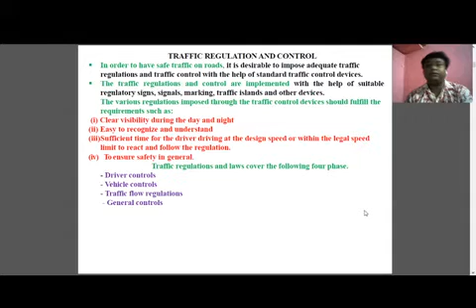Next is sufficient time for the driver, driving at the design speed or within the legal speed limit, to react and follow the regulation. Suppose you are moving on a road and in some places they highlight that the speed limit is 35 kilometer per hour. That is a kind of regulation or measure to control the traffic. If that regulation were not there, vehicles might pass that portion at 60 km per hour, but due to the geometric features they have fixed a speed restriction of 30 or 35 km per hour. These are control measures taken to reduce accidents, ensure smooth flow of traffic and ensure safety in general. If there are fewer chances of accidents, safety will increase.

Now, in the broad aspect, what is the regulation and control on the driver? First, control on drivers includes the eligibility for driving motor vehicles, the issue of driving licenses and other regulations on drivers during the act of driving. Second, as per the Motor Vehicle Act, the minimum age for getting a driving license for a non-geared two-wheeler is 16 years, and for a geared vehicle it is 18 years. Driving a motor vehicle without a valid driving license is an offense. As you all know, it is an offense to take your two-wheeler or four-wheeler out without a driving license.

Before the issue of a driving license for a specific category of vehicle, one has to undergo a specific test, the driving license test, conducted by the respective motor vehicle department. The driver is expected to demonstrate his ability. Separate requirements and tests have been specified for driving different categories of vehicle. Drivers are prohibited from dangerous driving, including exceeding the specified speed, drink and drive, and talk and drive, meaning talking while you are driving. These are prohibited, and all of you have faced this type of thing at some point in your life.

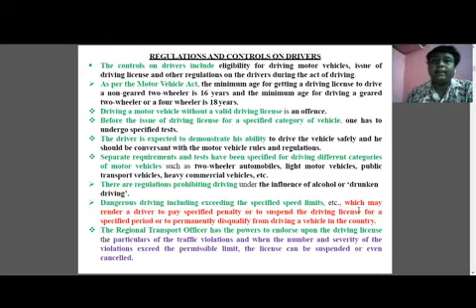So these are the very general and known things of your daily life, to get the idea about the various control devices. Next is the regulation and the control of the vehicle. This is the continuation of the previous. The regulation and control of vehicles include: the registration is essential, the information about the details of the vehicles, the different specifications of the public transport or hire vehicle or the private car, the specified color of the registration plate. The regulation covers at last the third party insurance.

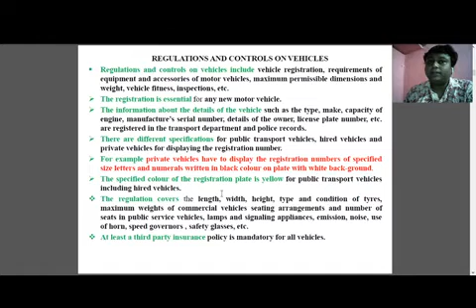So insurance is one of the most vital things. It is initiated at the beginning of your purchasing of any two-wheeler or four-wheeler or six-wheeler or any type of vehicle. So the implementation of the regulation. Basically, the traffic regulations have been enacted and implemented in India with the help of the Motor Vehicle Act in 1939 and the revised Motor Vehicle Act in 1988.

This has covered various traffic regulation measures like driver, vehicle ownership, vehicle operation on road and in traffic street. The various items covered are the traffic sign, traffic signal, the halting places, the speed of the vehicle, the gas emission. These are some of the parameters considered. Some of the most common traffic regulations are the one-way regulation and the turning restriction. The various other regulations are stop, speed limit restriction, overtaking restriction, parking. These are some general restrictions that should be implemented on the roadside.

Now we will talk about the various types of street, based on the traffic movement, whether it is a one-way street or a two-way street. Two-way means the vehicles are moving in both ways. One way means the vehicles are moving only in one direction. So in a one-way street, in a congested street, one of the methods to reduce accidents and ensure the smooth flow of traffic is by regulating the traffic along one street. If the vehicles are moving in a particular direction, then the accidents will definitely be comparatively less compared to the two-way street.

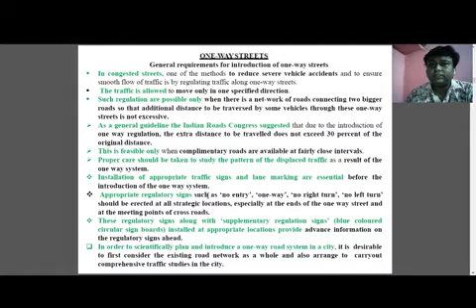So you can see that these are some one-way streets. I will not read out all the points. These are the basic things about the one-way street. Next, what is the advantage and disadvantage of the one-way street? The advantage is it increases the average travel speed, more effective coordination of signal system, increase in roadway capacity, more streamlined movement of vehicles, reduction in serious accidents involving head-on collision, reduction in conflict points at uncontrolled at-grade intersections resulting in reduction in accidents. I have already discussed the conflict points, at-grade and grade-separated intersections, so you have an idea about them.

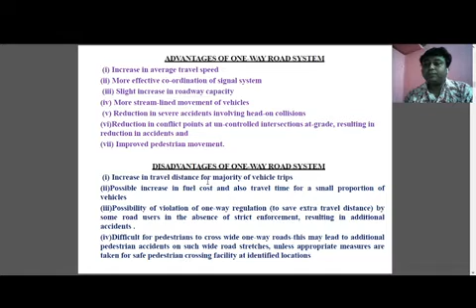Improved pedestrian movement. So these are some advantages, and there must be some disadvantages. The disadvantages are it increases the travel distance for the majority of vehicle trips, possible increase in fuel cost and also travel time for a small proportion of vehicles. If the travel distance increases, then definitely the travel time and fuel consumption will increase. Possibility of violation of one-way regulation by some road users in the absence of strict enforcement, resulting in additional accidents. It is difficult for pedestrians to cross wide one-way roads. This may lead to additional pedestrian accidents on such wide road stretches.

The traffic control devices installed along the road should be well within the field of vision of the drivers who are driving the vehicles at the design speed. The device should distinctly draw the attention. The location of these devices should be such that there is sufficient time for the drivers to respond and take

the appropriate action. The most common among the traffic control devices are traffic sign, traffic signal, road marking, and traffic island. Traffic island has already been covered, that is the rotary intersection or the roundabout. In addition, road lighting is useful in guiding traffic during the night.

So it is also essential that these traffic control devices and their meaning should be easily understood even by the road users who are not familiar, because these are some technical terms, but all the users using the road have not gone through this subject or have the proper technical skills or knowledge about these terms. So the dissemination of the information should be in the simplest form, so

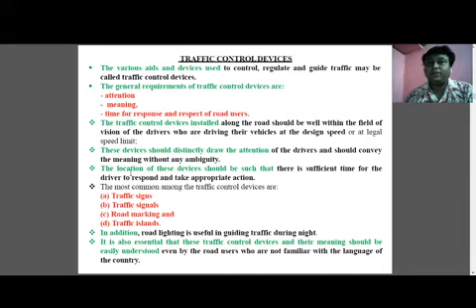that everyone in the country or in that area can understand what is actually defined. So this is one of the very important things which should be kept in mind while disseminating any traffic information through some traffic sign or through some road marking. So these are the general features of

All regulatory and mandatory signs are circular in shape. So keep in mind that for different types of signs, the shape and the color are different. So regulatory and mandatory signs are circular in shape with only two exceptions. They are the stop sign of octagonal shape and the give way sign in inverted triangle. So keep in mind that the regulatory or mandatory signs are always in a circular shape, excluding the stop sign which is in octagonal shape and the give way sign which is in inverted triangle shape.

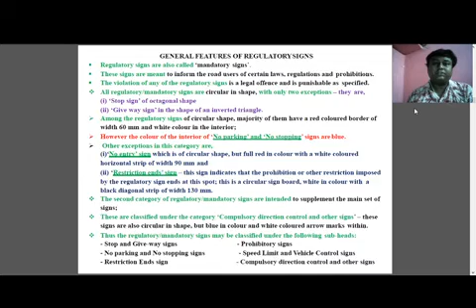So these are some signs you always find on your road or in any marketplaces, near any shopping places or dining places or your movie complex, multiplex. You can find this type of regulations each and every day, but you have not looked into this matter with serious concern. But next time when you visit any market, just get an idea how it actually looks, because these are very common things which you can find in your daily life.

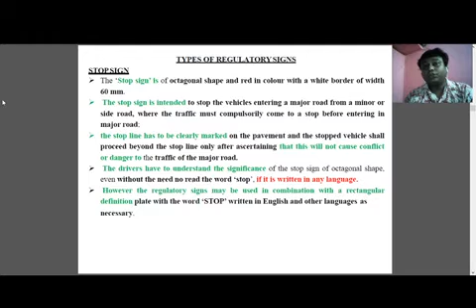Now the types of regulatory sign: the stop sign. The stop sign is of octagonal shape and red in color with a white border of width 60 mm. The stop sign is intended to stop the vehicle entering a major road. The stop line has to be clearly marked on the pavement. The drivers have to understand the significance. However, the regulatory sign may be used in combination with a rectangular definition.

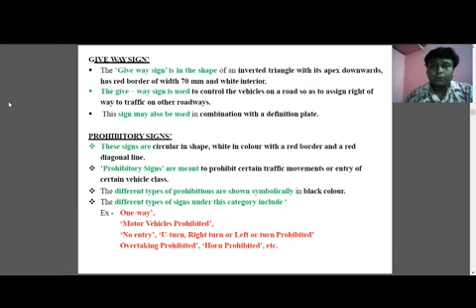There is a give way sign; give way means you want to give the passage to another vehicle. Then the prohibitory sign, no parking sign, speed limit sign, restriction end sign. So these are the various types of signs you can find in traffic design or in traffic engineering.

Next is the warning type of sign. That was the regulatory sign; this is the warning sign. What are the various types of warning signs? Warning signs are in the shape of an equilateral triangle with the apex pointed upward. They have a white background, red border, and black symbol. Warning signs or cautionary signs are used to warn road users of certain hazardous conditions that exist on or adjacent to the roadway. The warning signs are to be located at a sufficient distance in advance of the hazard. This distance is to be based on the design speed or the legal speed limit of the road stretch.

The commonly used warning sign is a sharp curve. This sign warns you that there is a hairpin bend just 30 meters from your present location. So these are warnings where there are chances of an accident or collision. There is a sharp curve, right hand and left hand curve, hairpin bend. So these are basically the warning type.

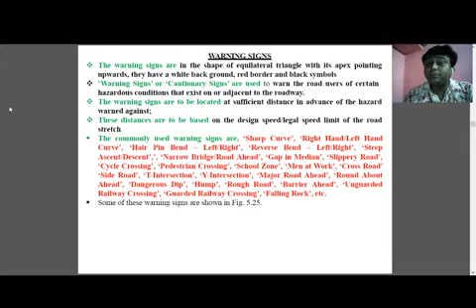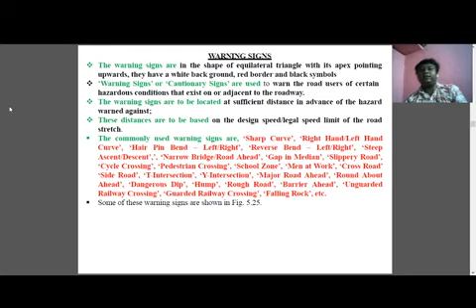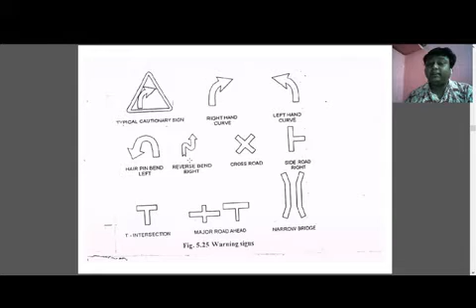Suppose a school is nearby, within the 50-meter zone. There may be men working at a particular area. In some places you can find that work is going on, men at work, please take a diversion. So these are some warning type signs you need to follow on the road. A typical cautionary sign: right hand curve, left hand curve, hairpin bend. These are the particular directions or structures of the various types of warning sign.

Next is the informatory signs. By the name itself you can get the meaning. An informatory sign gives you some information. Suppose, as I said in the beginning, you are traveling on a totally new road at night, and suddenly you need some fuel. You need to have an idea of where the fuel station actually is. By this informatory sign you can find out that just after 2 kilometers you can get a fuel station. So this is the informatory type of sign.

The informatory signs are rectangular in shape. The signs are used to guide road users along the roads and inform them of destination and distance, thus making travel easier, safe and pleasant. The color chosen for informatory or guide signs depends on the classification of the road. On national highways and state highways, informatory signs shall have a green background with the border and word messages in white color. For all other categories of road, such as MDR, major district road, ODR, other district road, and VR, village road, these signs have a white background with the border and word message in black color.

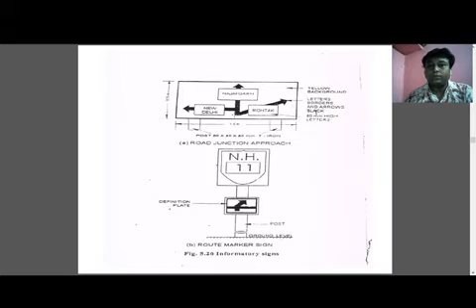Suppose at a 3-point junction, if you go to the left side you can find New Delhi. If you go straight you can find Najafgarh. On the right side you can find Rohtak. So basically this gives you the information about the direction of the road or the facilities along the road.

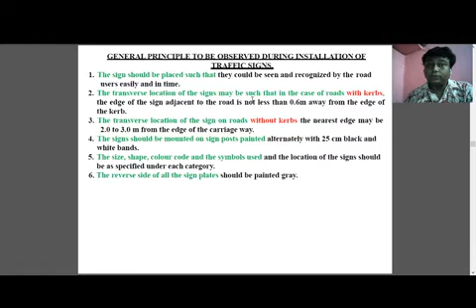General principles to be observed during the installation of traffic signs. The traffic sign should be placed such that it can be seen and recognized by road users. For a road with a curve, in the turning area, you can install the traffic sign so that the user can easily identify it. For the transverse location of signs on roads without kerbs, the nearest edge may be 2 to 3 meters from the edge of the carriageway.

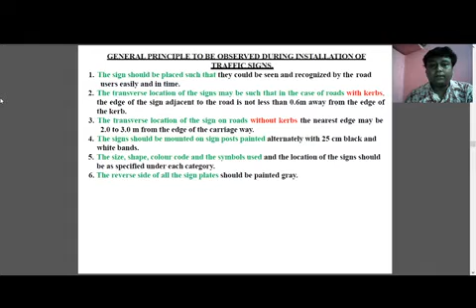The sign should be mounted on a sign post painted alternately with 25 centimeter black and white bands. The size, shape, color code, symbols used and location of the sign should be as specified under each category. The reverse side of all sign plates should be painted gray. So this is all about traffic signs and road markings. Now we will discuss the traffic signal.

Traffic signals are also one of the very important aspects in traffic engineering. What are the various objectives of the traffic signal? The objectives of traffic signals are as follows: at intersections where there is a large number of crossing and right turn traffic, we need to install a traffic signal.

So basically these are the warrants for installation of the traffic signal, meaning the conditions on the basis of which we go for a traffic signal installation. On a crossroad with two lanes and two-way traffic, there are 16 cross conflicts. As I told, I will not discuss more details of the conflict points because this has already been covered. So based on the number of conflict points, the installation of the traffic signal comes into the concept. The problem of such conflicts at the intersection gains more significance as the traffic volume increases.

In such situations, the earlier practice has been to control the traffic with the help of the traffic police. Thus, the crossing streams of the traffic flow are separated by time segregation. In bigger cities, a large number of police personnel are required simultaneously to control the traffic during the peak hours at most of the junctions with heavy traffic flow. Therefore, traffic signals are made use of to perform this function of control at the road intersection. The main requirements of traffic signals are to draw the attention of the road user, enable them to understand the meaning of the light signal, provide sufficient time to respond, and ensure minimum waste of time.

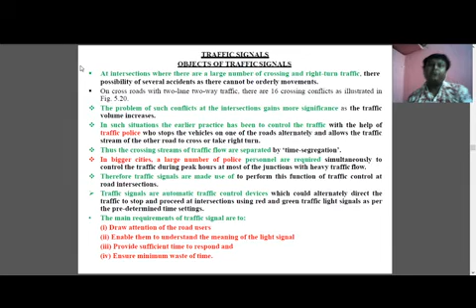So what are the advantages? The advantages are: they provide orderly movement of the traffic, the quality of the traffic flow is improved, reduction in accidents, traffic handling capacity is highest, they provide a chance for the traffic of the minor road to cross the continuous traffic through the major road. A pedestrian can cross the road safely. When the signal system is properly coordinated, the speed of the vehicles is maintained. Automatic traffic signals may work out to be more economical when compared to manual control.

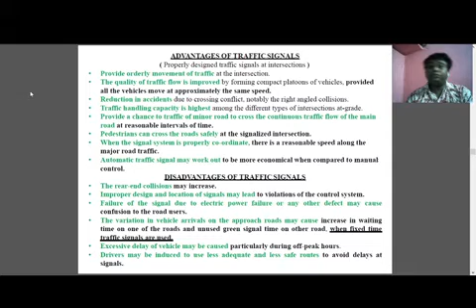What are the disadvantages? Rear end collisions may increase. Improper design and location of signals may lead to violation of the traffic control system. Failure of the signal due to electric power failure or any other defects may cause problems. The variation in vehicle arrivals on the approach road may cause problems. Excessive delay of vehicles may be caused. Drivers may be induced to use less adequate and less safe routes.

So these are some definitions of the basic terminology used in signal design. The first is the signal cycle, then the signal phase and the interval. These are basically the three basic terms you should know before going to the detailed calculation, the detailed study of the traffic signal. At the end of this session, you will also find some mathematical problems on how to design the traffic signal. So before that, you should have an idea about the signal cycle, signal phase, and interval. So what is a signal cycle? The period of time required for one complete sequence of signal indications.

Sequence means, as you have seen in a traffic signal, basically there are three types of traffic signal colors. One is red, one is green, another one is yellow. So red is known as the red time, as you know. Green is known as the green time. Red means you have to stop your vehicle. Green means you can go. There is another signal, the yellow, which is known as the amber signal.

In that signal, the responsibility of the driver is to look around his or her vehicle, so that they can initiate the start process to get the green signal and move the vehicle. So this is totally get, set, go. Basically, in between get and go there is the term set. This set is basically initiating the engine of the vehicle to start, and this period is known as the amber time. This amber time is typically 2 to 4 seconds or 2 to 5 seconds. In general it is between 2 to 4 seconds.

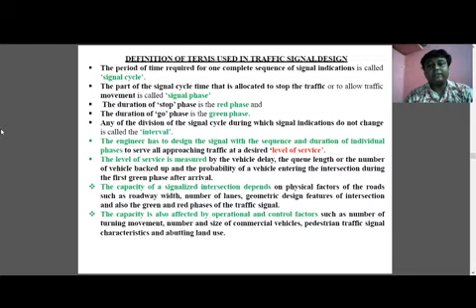The capacity is also affected by operation and control factors such as the number of turning movements, number and size of commercial vehicles, pedestrians, traffic signal characteristics, and abutting land use.

Now the type of traffic signal. Traffic signals are basically classified as the traffic control signal, the pedestrian signal, and the special traffic signal.

The traffic control signals have three colored signals: one is green, one is red, and another is yellow, which is known as amber.

The red light means stop, the green light means go, and the amber or yellow light allows clearance time for vehicles which enter the intersection area by the end of the green time, so they can clear the intersection before the change over to red.

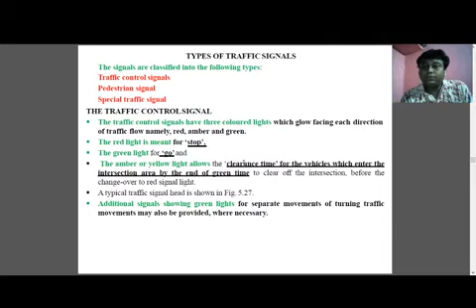Next is the pedestrian signal. The pedestrian signal may be installed at intersections controlled by the traffic signal; in such cases, the pedestrian signals and their timing are interlinked to operate along with the traffic control signal. At certain locations of mid-block stretches of urban roads with high demand for pedestrian crossing, special types of signals are used.

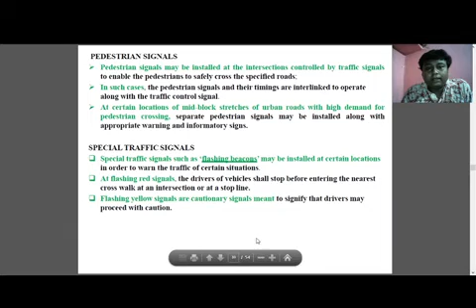There are also various special types of signals, such as flashing beacons, which may be installed at certain locations. A flashing red signal, or a flashing yellow signal or cautionary signal, signifies that drivers may proceed with caution.

Traffic control signals are controlled by different methods, or designed by different methods. The first one is the manually operated signal.

Manually operated means there are some persons, some traffic police, who control the traffic signal, or the phase—meaning the duration of the traffic signal of each phase, the interval of each phase—based on the number of vehicles arrived at that intersection. That is the manually operated type.

Next is the fixed time automated signal, which is basically an automatic traffic signal that is fixed. Fixed means whether there are fewer vehicles or more vehicles, the red time, green time, or amber time is fixed throughout the day and throughout the night. Next is the automatic traffic actuated signal, which varies based on the number of vehicles arrived at that particular location.

So manually operated, as I said, is each manual signal operated from a salient point near the intersection by the traffic police. The fixed time, as I said, is a fixed operation.

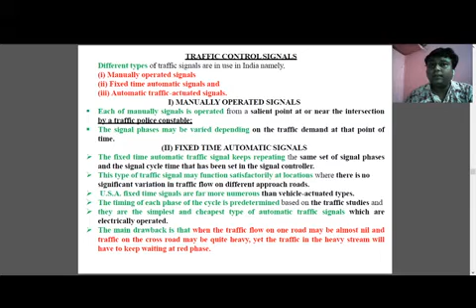So whatever I gave in a brief manner is elaborately discussed here. Next we will discuss automatic signals, which are further divided into semi-actuated traffic signal, fully actuated traffic signal, and modern fixed time equipment.

What is the automatic traffic actuated signal? Traffic actuated signals are those in which the time of the phase of the cycle changes according to traffic demand, as I said it is basically varied. Now you will ask me, how do they detect the traffic, or what will be the duration for that?

So for that, all the vehicles at the particular intersection should have some sensors. Based on that sensor, they will count the number of vehicles. So this is a very costly system, or costly infrastructure to install at a particular location.

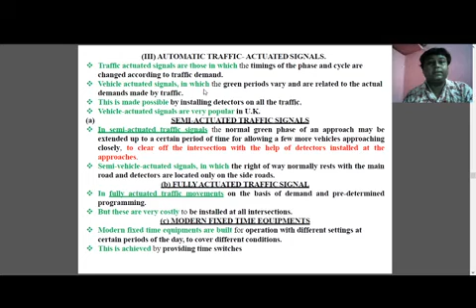So basically we will follow the manually operated or the fully operated system. These automatic traffic actuated signals are costly in actual case.

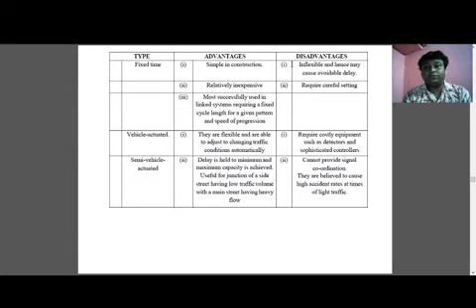What are the disadvantages? Inflexibility, and hence may cause avoidable delay. Required careful setting, required costly equipment such as detectors and sophisticated controllers. So basically this is the overall advantage and disadvantage of the traffic signal.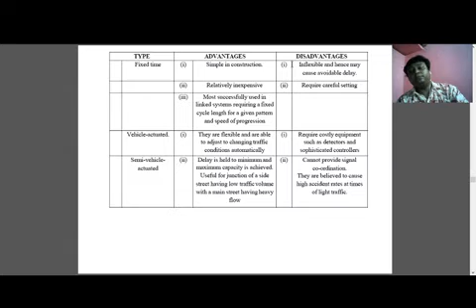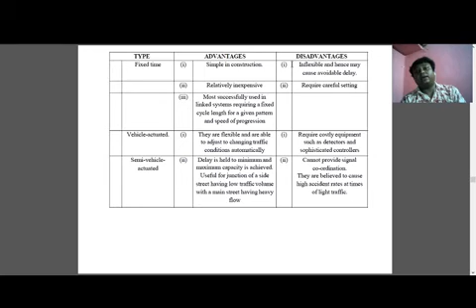If you are talking about the costly equipment point, this costly equipment is mainly used for the actuated traffic signal system. The equipment is also costly in the fully automatic system, but the cost is comparatively 3 or 4 times higher in actuated traffic signals.

Coordinated traffic control signals: coordinated signal system on a road network of an area is a very complex problem. Area traffic control system with coordinated signal network is to be implemented with the help of advanced technology. This is an advanced type of traffic signal, which is rarely found in a developing country like India.

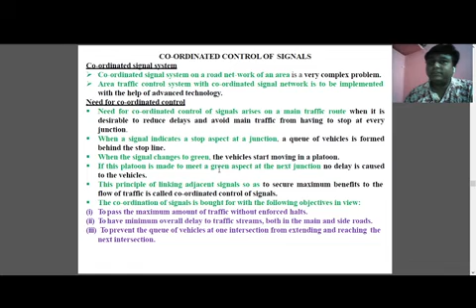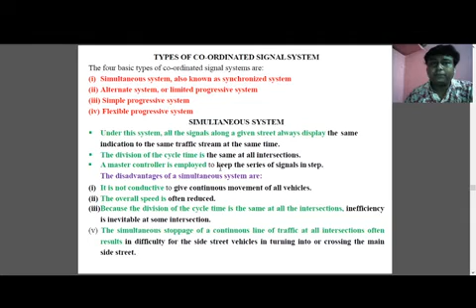As I said, you can basically find the manually operated traffic signal or the fully automatic traffic signal. These are some four basic types of the coordinated traffic signal system. I will not go into deep discussion on this, because these are used very rarely in practice.

Okay, so now we will directly go to the various types of design methods of the signal. This is one of the vital or important things we need to understand for designing the traffic signal. There are four methods: the trial cycle method, the approximate method based on pedestrian crossing, the Webster method, and the design as per the IRC guideline.

So basically we will follow methods number 1 and 3, that is the trial cycle method and the Webster method. Let's have some detailed idea about these two methods, and at the end of the class, as I said, we will also solve some mathematical problems.

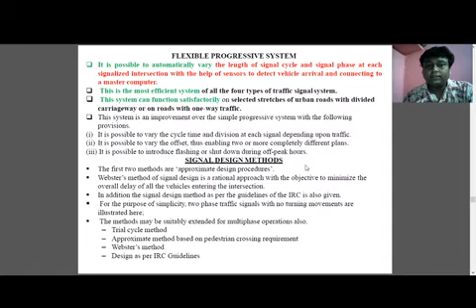The first two methods are approximate design procedures. Webster's method of signal design is a rational approach with the objective to minimize the overall delay of all vehicles entering the intersection. In addition, the signal design method as per the guideline of IRC is also given. For purpose of simplicity, two-phase traffic signal with no turning movements are illustrated here.

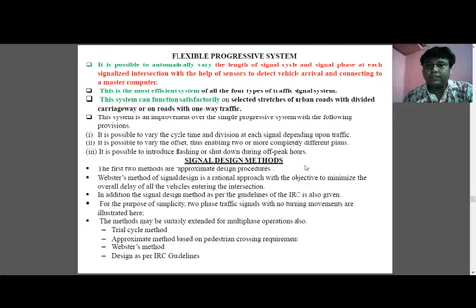The method may be suitably extended for multi-phase operation also. So there are the trial cycle, approximate Webster, and the design as per IRC. This is the trial cycle method.

As per the trial cycle method, while we calculate the design of the trial cycle or any type of traffic survey, in the beginning of this course I told you that for any survey, a 15-minute each hour survey is conducted on the field. So as per that, a 15-minute traffic count on two roads is taken.

Suppose there are two roads: road 1 known as N1 and road 2 given as N2. So a 15-minute traffic count N1 and N2 on road 1 and road 2 is noted during this design peak hour. Some suitable trial cycle C1 is assumed, and the number of assumed cycles in that 15 minutes, that is 900 seconds, is found to be 900 divided by C1.

Let's just get an idea: suppose there is a 15-minute survey. So 15 minutes mean what? 15 minutes means 900 seconds. So if one cycle is considered to be C1, then how many cycles are there? Total duration is 900 seconds and one cycle is C1, so the number of cycles is 900 by C1. That's the simplest thing, so don't get confused there.

Next, assuming an average time headway of 2.5 seconds, the green phase G1 and G2 on road 1 and 2 are calculated to clear the traffic. The calculation of G1 and G2 is given by this equation: G1 is 2.5, that is the headway, time headway.

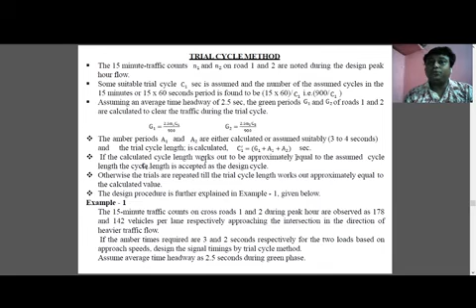The trials are repeated till the trial cycle length works out approximately equal to the calculated value. So there's no fixed rule that you do 4 trials or 5 trials. You have to repeat trials until your assumed value and calculated value are the same. That is why we say the trial cycle method is laborious and time-taking.

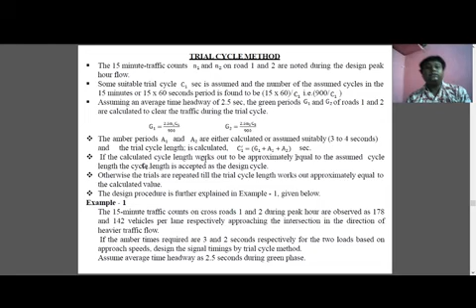The design procedure is further explained with an example. The 15-minute traffic count on crossroad 1 and 2 during the peak hour are observed as 178 and 142 vehicles per lane respectively, approaching the intersection in the direction of heavier traffic flow. The amber times required are 3 and 2 seconds respectively for the two roads based on approach speed. Design the signal timing by the trial cycle method, assuming a time headway of 2.5 seconds. Let's solve this problem.

For the given 15 minutes, the observed vehicles are 178 and 142 for road 1 and road 2. So N1 is 178, N2 is 142, A1 is given as 3 seconds, A2 is 2 seconds, and time headway HT is 2.5 seconds. Now initially we assume a trial cycle of 50 seconds, so the number of cycles is 900 by C1, which is 18.

The green time for road 1, allowing average time headway 2.5 seconds, is G1 equals 2.5 times N1 (178) times C1 by 900. If we bring C1 into the denominator, it becomes 900 by C1. Since C1 is assumed to be 50, 900 by C1 works out to 18, which is why it's written as 18 here.

In the same way, they calculated the value for road 2. For road 1 it is 24.7 seconds and for road 2 it is 19.7 seconds. Now the amber times are given as A1 and A2, 3 and 2 seconds. So the total cycle length C equals G1 plus G2 plus A1 plus A2. Summing up all this, it comes out to 49.4.

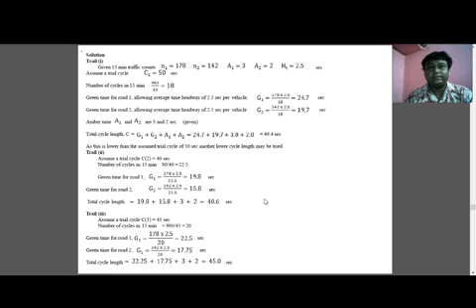Now based on that, we have to design the signal timing. Our work isn't finished just by calculating the cycle time; we have to design the traffic signal. So the trial cycle of 45 seconds may be adopted with the following signal phase: G1 is 22.25, say 22 seconds, and G2 is 17.75, say 18 seconds. Adopt A1 as 3 seconds and A2 as 2 seconds, as already given.

So the total cycle time is 45 seconds as calculated. So here you can find out how they design it. If you see this diagram, only this diagram, what is your value of G1? G1 is 22 seconds. What is the value of A1? G1 means the first green.

So after the green there will be some yellow sign, that is the amber sign. After green the red sign never comes directly. In between green and red there will always be some yellow time, that is the amber time. So what is the amber A1? A1 is 3 seconds. So G1 is 22 seconds, A1 is 3 seconds.

Okay, and the second amber one, but here you cannot find out the R value, the red value. So the calculation of the red value is some kind of back calculation. How? Suppose your G1 is 22 seconds, A1 is 3 seconds. So after that what will come? After that the red signal will come, but we don't have the value of red. Okay, but we have the value of after red.

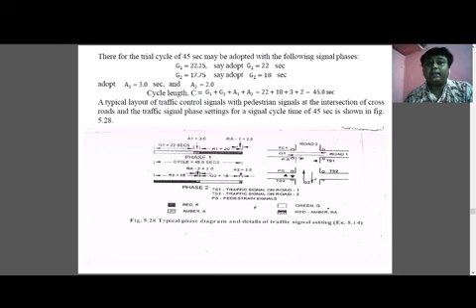Next we again have to find out the red time, but we don't have the red time value. What value do we have? We have the value of amber and the value of green. So by adding this amber and green and deducting from the total signal time, we get the value of the red time. In this way we calculate the amber time, green time and red time. Next we will come to the Webster method.

This is another method. The Webster method calculation is totally based on saturation. It has been found from studies that the average delay and the overall delay of vehicles at the signalized intersection vary with the signal cycle length. The average delay per vehicle is high when the cycle length is very short, as a sizable proportion of vehicles may not get cleared during the first cycle or may spill over to the subsequent cycles.

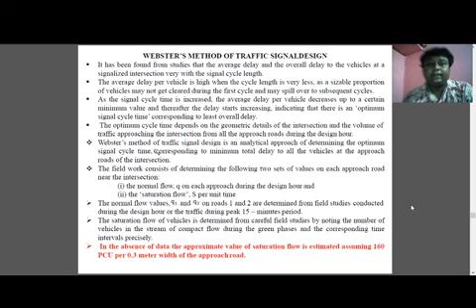So the field work consists of determining the following two sets of values, that is the normal flow q and the saturation flow s. The optimum cycle length C0 is calculated by the equation C0 = (1.5L + 5) / (1 - Y), where L is equal to total lost time, which is written as 2n plus R, where n is the number of phases

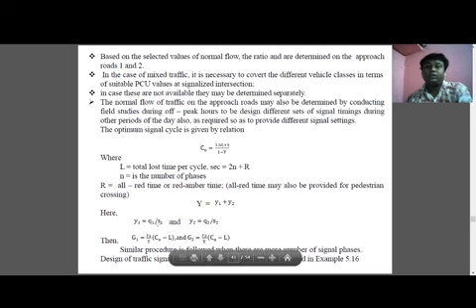and R is the all-red time, and Y is equal to y1 plus y2, where y1 is equal to q1 by s1 and y2 is equal to q2 by s2, and from this we can calculate g1 and g2. So this is a mathematical problem, a very simple problem. All values are given and from that we calculate the total signal time, and from that we find the signal design. The last method is the IRC method.

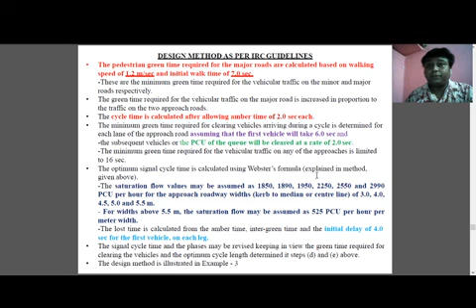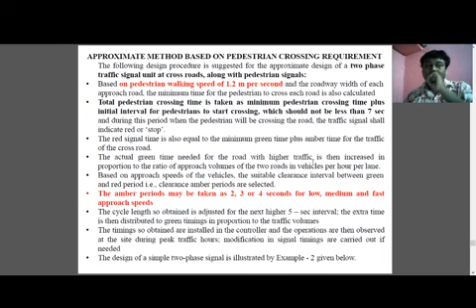I will not go into details on this. It is a very simple thing. The important ones are the Webster and the trial cycle method. You can just get an idea from this lecture itself of what the IRC guidelines suggest. This is the problem solved by the IRC. The IRC or approximate method is the simplest thing and will not take much time to understand; the main time is taken by the Webster method and the trial cycle method. So this is all about traffic signal design.